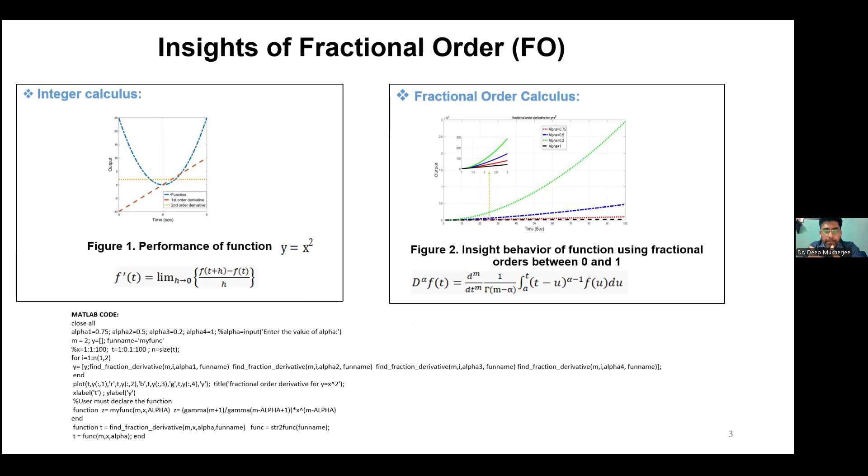But whenever you design the fractional order control, you will get a fractional order transfer function, and solving this fractional order transfer function in MATLAB is a very difficult task. That is why it's a very common practice to approximate the fractional order term into an integer order form.

Otherwise it is a long time simulation run, because infinite memory is there. More memory elements means it requires more past values of information, so it runs for a long time and is computationally expensive. To overcome this computational complexity, approximation is very necessary. There are two types of approximation available: one is the indirect approach, and another is the direct approach.

If you find any research papers or materials on fractional order control, in most cases the direct method has been applied, not the indirect methods. The reason is that indirect methods are basically of three types: the GL method, Grünwald-Letnikov; the Riemann-Liouville method; and the Caputo fractional differential method. They follow a discretization rule.

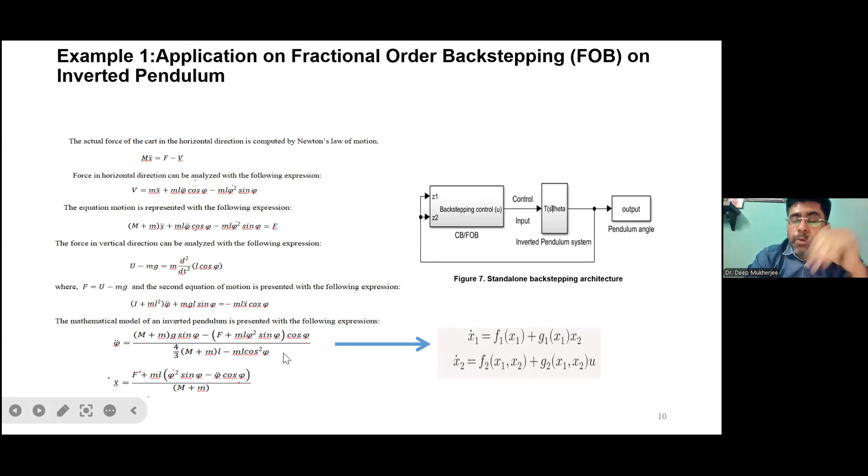So this is Z1 and Z2, that is the subsystem. This is the particular nonlinear model. For these nonlinear models, you have to define the subsystem. There are state variables you have to represent to design the backstepping law. So that is y1 equals phi and y2 equals phi dot to the power alpha here. So after identifying this particular state variable, the state equation comes.

So y1 dot equals y2, and y2 dot equals a function of y1, y2 plus g of y1 times u. Okay, so this is basically the kinematic form. The first row, y1 dot equals y2, is the kinematic form, and the second term isolates the nonlinear drift and the gain, and u is the actual control input that needs to be designed. So the first subsystem needs to be stabilized first, followed by the second subsystem.

So here you have to use two Lyapunov functions. First v1 that we have considered in the same rule. Following the rules, here we have shown step by step the design method. For the backstepping controller we have designed this subsystem z1 equals y1, and followed by that we have constructed this Lyapunov function v1 equals half z1 squared, and the corresponding fractional derivative because alpha is there. So that is the expression that we have got.

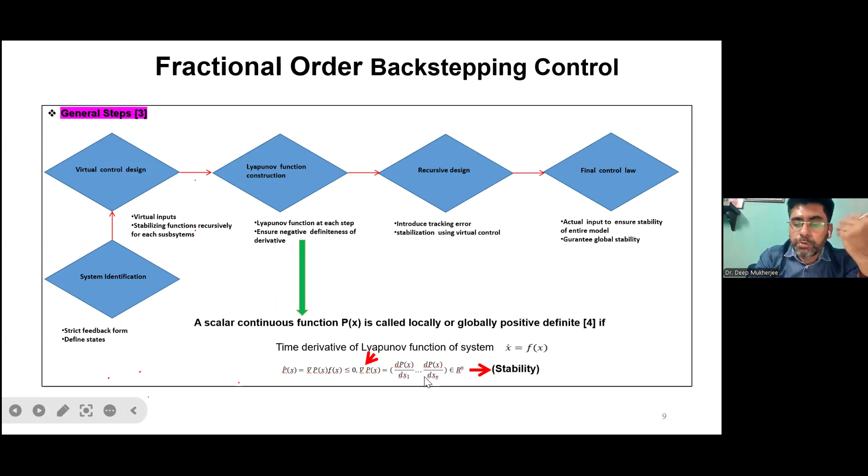So now you have introduced the error, because you have to compute the virtual control law. This is the particular error function, and this y1 is the virtual control. By substituting, with some necessary arrangements and simplification, we need to stabilize the first subsystem, that is z1, so that it should be less than 0. It should follow this Lyapunov function criterion, the criterion of global asymptotic stability. After that, you have to move to the second subsystem.

So you have to introduce the second Lyapunov function, that is half z1 squared plus half z2 squared. Similarly, you have to define the second subsystem to make it stable. So that is the particular law. So by necessary substitution here, with the parameters that we have, finally we achieve this control. So that is the u, known as the final control input.

So it is known as a backstepping law. This is a backstepping law because there are two subsystems that we have incorporated here. If you were to apply 3-4 subsystems, it continues. So until this final control law is achieved, you have to move step by step backward, stabilizing each subsystem by ensuring global stability, so that your entire model is stable. So that is the final control law.

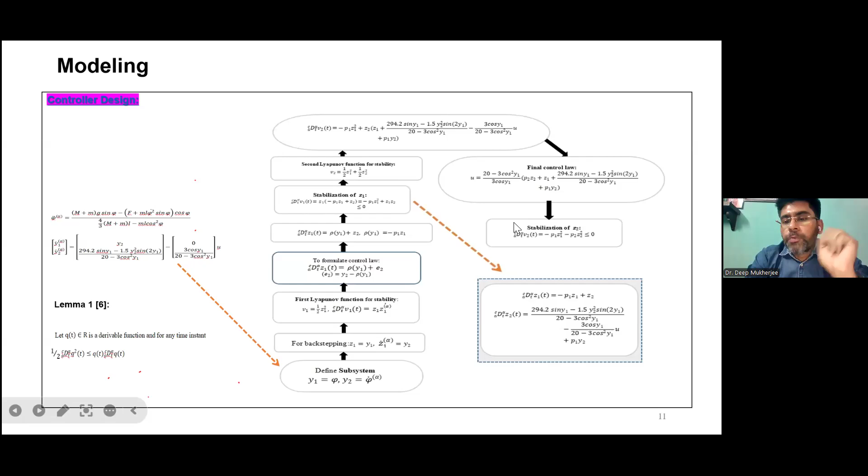So here, by trial and error, we have chosen the fractional order values, which may be 0.4, 0.8, and 0.6. We have not applied an optimization technique, but research is going on; it is under process, and the next work will apply the optimization technique. So first, to observe how this backstepping control works and how it performs against the other scheme, we randomly chose the fractional order 0.6, 0.8, and among these we chose the appropriate fractional order by looking at their time domain and frequency domain analysis.

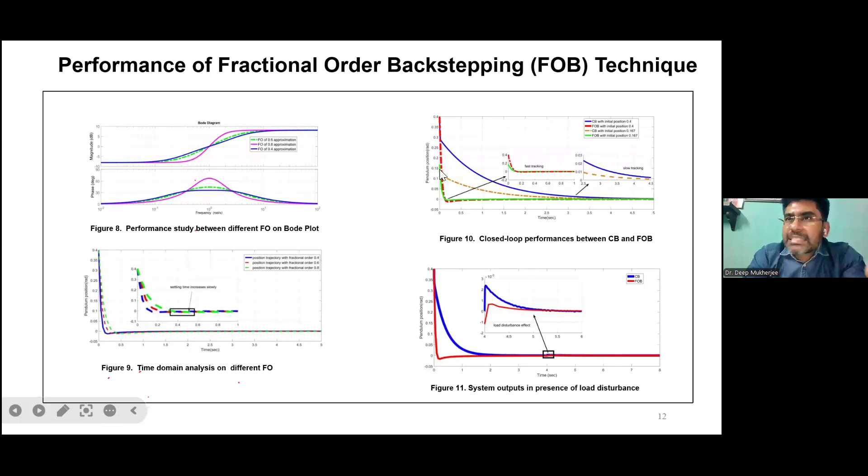So here we have chosen the fractional order 0.4. Using this fractional order 0.4, we observed the response performance of conventional backstepping and fractional order backstepping methods. We started from a random initial angular position of 0.4 and 0.167, and our objective is to stabilize the system to the upright position, that is 0. Both conventional backstepping and fractional order backstepping successfully track this 0 position, but the conventional one becomes sluggish and takes more time to reach the upright position, unlike the fractional order, which quickly settles at the 0 position.

So here the fractional order backstepping outperformed the conventional one. We moved on to several analyses by applying a load disturbance at time t equal to 4 seconds, and observed the effectiveness of this topology over the conventional backstepping methods. It quickly settles at the zero position, unlike the conventional backstepping methods. Here we introduced noise and applied a saturation limit in the presence of noise, and we observed that the fractional order control effort gives a more stable control output, with no such oscillations, unlike the conventional backstepping methods.

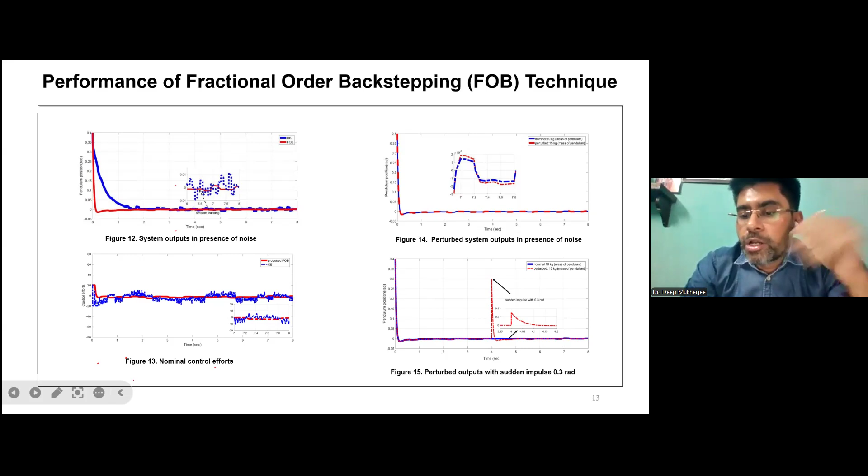Another important measurement that we have done: at 4 seconds we applied a sudden impulse of 0.3 radians. So it starts from 0.4 and suddenly 0.3 radians is applied. Despite this sudden impulse, you can notice the fractional order control effectively tracks the zero position without oscillations. So this is the most handsome outcome that we are getting using the fractional order backstepping methods, and here we also changed the value of the mass of the pendulum. So we have tested the robustness of this fractional order backstepping, incorporating the sudden impulse at 0.3 rad.

Okay, so now here a comparative study has been done. These are our previous works that we have published in papers, where we applied fractional order model reference adaptive control to the pendulum models, with the particular tuning parameters we utilized on these models, and here we have applied fractional order backstepping methods. If you see the outputs in presence of noise and the nominal control efforts, the proposed fractional order backstepping method outperforms the other schemes.

This analysis proves that the proposed fractional order backstepping, under disturbance, outperforms in terms of lower performance metrics, less error and less total variation. That is the outcome we have got throughout this analysis. So the proposed FOB can be considered the most efficient alternative topology to stabilize this mechanical under-actuated process, for example the pendulum we have used, which is more stable.

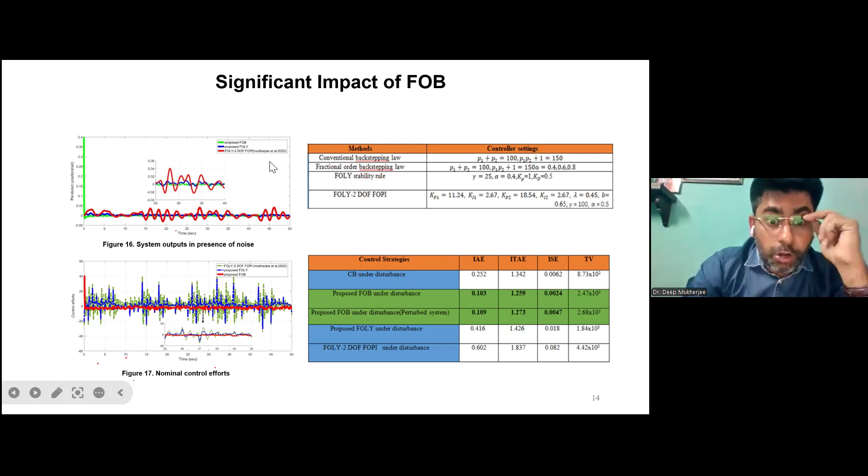Through the analysis we observed that the Lyapunov stability rule outperforms the MIT rule, because the MIT rule does not give you the inherent stability of the process. That is what we experienced on this particular nonlinear system. Similarly, by applying this FOB, we have designed for the continuous stirred tank reactor, CSTR, models. That is a three-state system: height, concentration, and temperature.

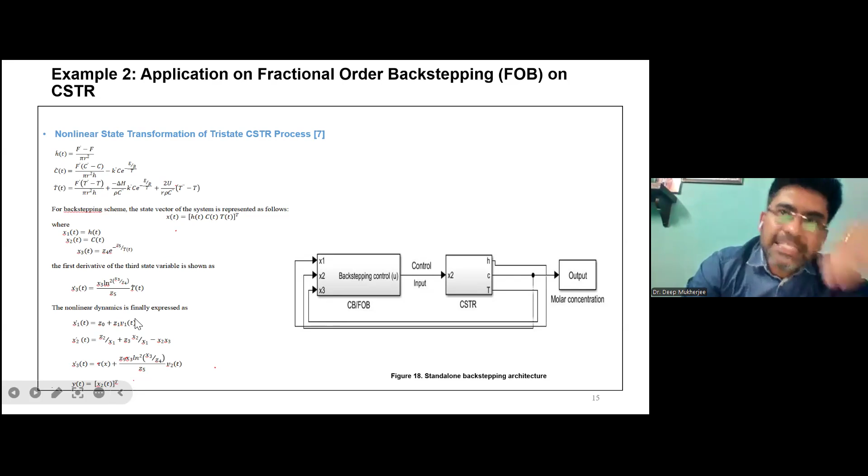You first select the control variables, then introduce the errors. By using the necessary substitution and simplification, you stabilize the first subsystem, then move to the second subsystem for stabilization. The first subsystem includes the Lyapunov function. By getting the fractional order derivative, which comes out less than 0, negative, it shows global asymptotic stability.

Like the inverted pendulum, we applied the same procedures to the CSTR process, and ultimately designed this fractional order stability law. It steps backward from the inner subsystem, and each subsystem is stabilized by introducing the virtual control law and error brackets. You introduce a particular Lyapunov function to ensure global asymptotic stability, so that the entire model becomes more stable. That is the main fundamental concept of this fractional order backstepping topology.

Fractional order means we have just introduced an additional degree of freedom, that is the alpha. That's all. Now you have to solve this approximation; you can solve it using the biquadratic exact phase, or the Oustaloup approximation. But what I have experienced and shown here is that the biquadratic exact phase is a better alternative than Oustaloup, because it provides a more stable approximation.

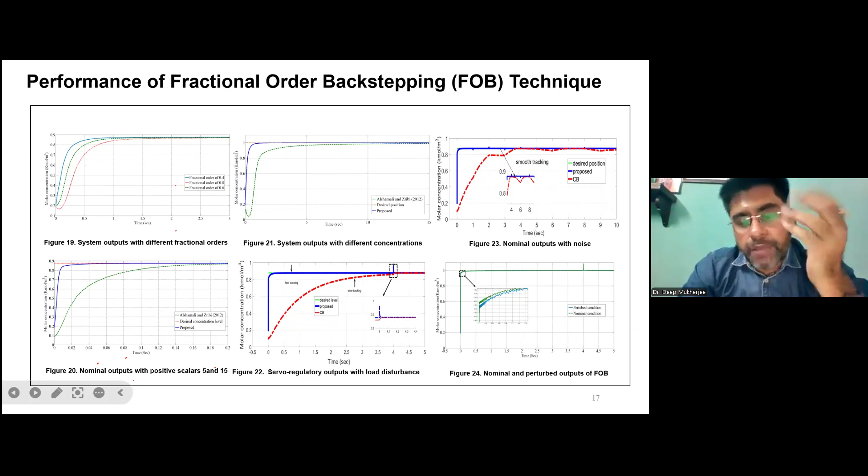So here are the nominal and perturbed conditions. We have applied this by changing the CSTR parameters, the internal parameters, and analyzed the robust performance. It still follows this particular track and concentration level in spite of changing the parameters. So we have attained this performance through the fractional order backstepping method.

And here we have also introduced some noise, and it shows that the fractional order backstepping is robust in the noise rejection process. We have compared this fractional backstepping with some existing work, FOPID by experts, and our works, FOLY-FOPID, and the augmented FOPID with FOMRSC technique. We observed the servo responses, outputs and input control efforts, and concluded that the proposed FOB more swiftly and gracefully tracks the concentration.

In spite of load disturbance and introduced noise, it shows the most robust noise rejection and more stable outcomes, with lower performance errors: integral square error, integral absolute error, and so on. These values are lower than the other control topologies. We also found the total variation, TV, of the control output.

So throughout this analysis, we can conclude that the fractional order backstepping shows no overshoot, robust servo and noise rejection, high speed of convergence, the lowest error metrics, and the smoothest control efforts. So that is all about my work.

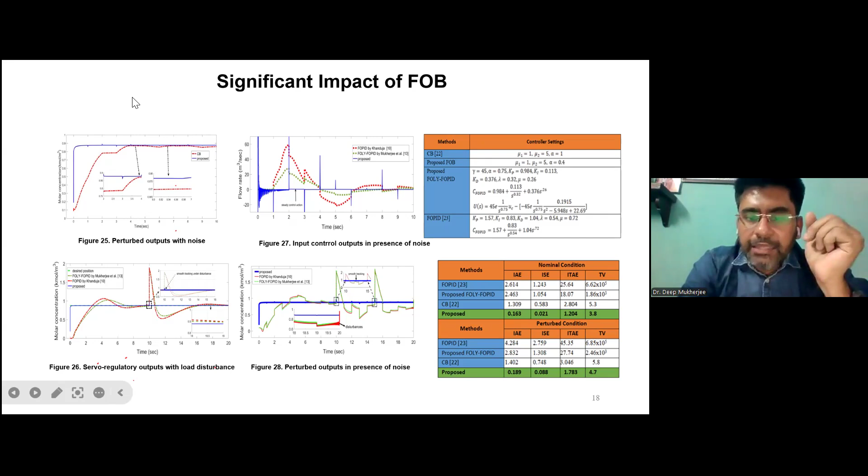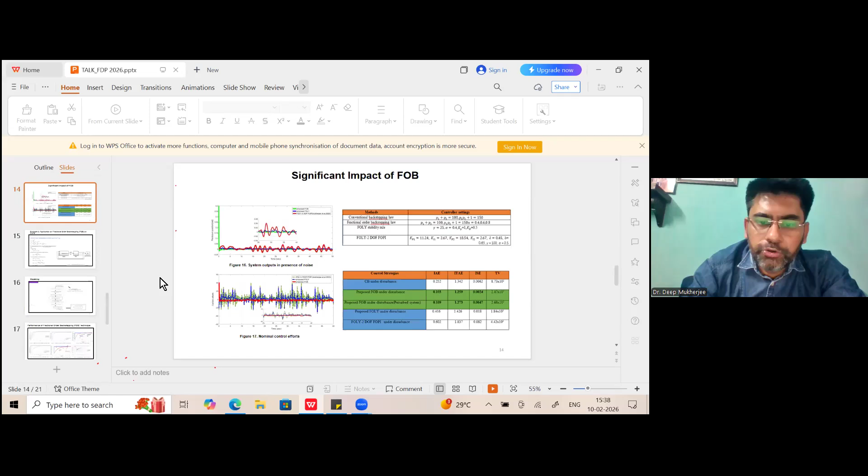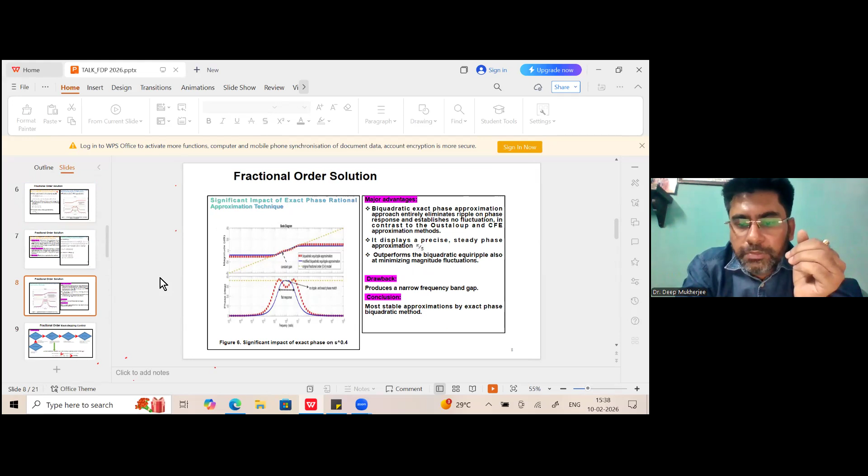Different fractional order control techniques like direct and indirect methods. Basically, from my opinion, what we have faced till now is that the indirect method is mostly preferred, because if you put it in real time with entire transfer function models, you have to transform into discrete form. It has to be truncated from infinite memory to n series elements. So you have to look for accuracy, the step size, and other things - this complexity may come up in this case.

So there is a long time simulation. There is computational complexity involved.

That is why, for fractional order approximation, if you solely approximate - suppose s to the power function - this is only approximated and converted to a rational transfer function model, a suitable integer order form, so that you can get a better approximation process. That would be easier to implement. But if you use a rational transfer function model, that will save you time, and you just have to look at frequency bandgap selection - by lower and higher order frequency bandgap selection in real time, you can approximate the particular fractional order. So in this way we can think about it.

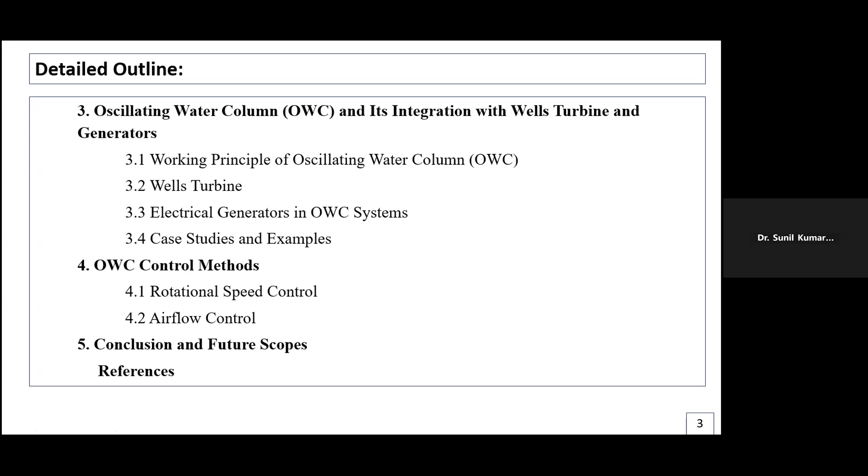So as we know, renewable energy is actually the need of the day.

The most important thing is that fossil fuels are limited, and when we use them, the chemicals released into the environment cause a lot of problems for our climate, like global warming, and also pollution of the air that creates problems like lung problems. So it is very important to include as much renewable energy as possible.

With this motivation, I started working in this area, like other areas such as solar energy, wind energy, geothermal energy, and tidal energy. I explored ocean wave energy, mainly from my PhD time, and I did my PhD thesis on this.

This area is not very new actually, it is very old, but the investment needed in this area has been very less. That is why we are still in the early stage of development in this area.

But ocean wave energy is also very significant. How can we say this is significant? Because we know the oceans cover almost 70% of the Earth's surface, and a country like ours, India, has almost 2/3 coastal area, meaning from three sides we have coastal lines. So if small plants are installed in these coastal lines that can store and supply energy for local needs, it can complement other energy sources, and the demand for other sources can be lowered significantly.

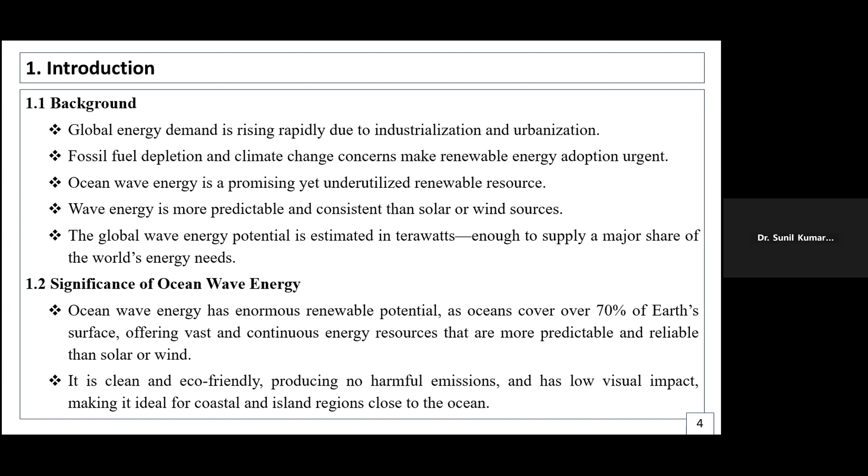Now, when we talk about history, the wave energy concept existed earlier too, waves were used for different purposes. But the first technology like oscillating water column was developed in 1966. This was used as a floating buoy for lighting lamps when ships were navigating through oceans. Small turbine columns, oscillating water columns, were used to drive small turbines to light lamps used inside the ship. So it was a very old concept.

Later, this concept was used on the seashore to convert sea wave energy into electrical energy. If you search 'oscillating water column pilot projects' on the internet, you'll find many pilot projects running throughout the world, in countries like UK, Portugal, Spain, Australia.

In fact, our country also had one oscillating water column power plant, installed in 1991 in Thiruvananthapuram, Kerala. It was there since then, but because it completed its lifetime and there was no further investment in this area, it was decommissioned in 2010.

More recently, one professor in IIT Madras, Professor Abdus Samad, is also working in this area, ocean wave energy. He has tied up with a private company for making the prototype and deploying it in the sea. So many pilot projects are there all over the world, some at the commercial level, some at pre-commercial level, and some are pilot projects only, but full commercialization of this is still awaiting.

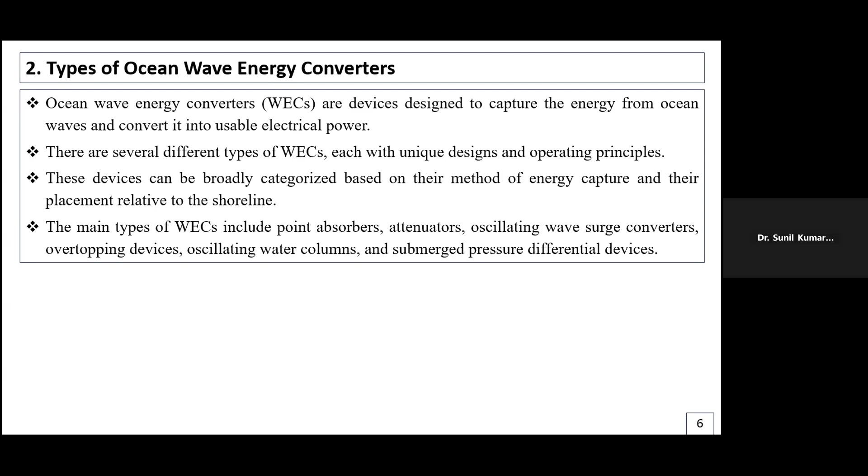So first, it is very popular actually, the point absorber. So if we see how this converts into electrical energy, you see this actually represents the sea waves.

I just want to confirm, am I audible properly and understandable to everyone? Yes, sir, you're audible. Okay, thank you, madam.

Okay, so here you see this is just a representation of the wave. So when waves come, there is a floating buoy which goes up and down, and here it is connected with a piston, and it is a kind of linear cylinder. So here it is directly connected to a linear generator, so that generator directly generates electricity. This is one way, or it may also be connected to a hydraulic, which converts linear motion into rotatory motion. So that can also be done.

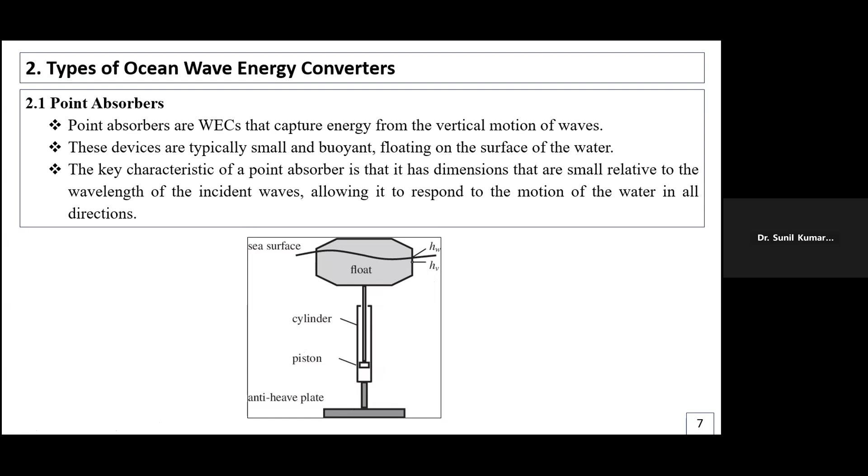Based on that, when waves keep on coming and this float goes up and down, electrical energy is generated. Obviously, it will be fluctuating energy, but this is one of the techniques for converting into electrical energy. Later, that energy can go through power converters. All those things can be smoothened out and stored somewhere, and then later it can be used. So this is one technique, and this is a practical example of this technique, the point absorber device.

So this is called attenuators. These attenuators have joints. These are actually different tubes, connected together, and in the middle we have some power conversion modules. These are tied to the seabed. You see these lines are tied to the seabed, so that it does not go away with the flow of waves.

So here you see when the waves come, these tubes will move up and down. Based on that, these hydraulic systems will have some differential, and based on that differential, some potential will be generated and electrical current will flow. Together all these are connected, and then this power is generated and taken out. So this is another technique called attenuators.

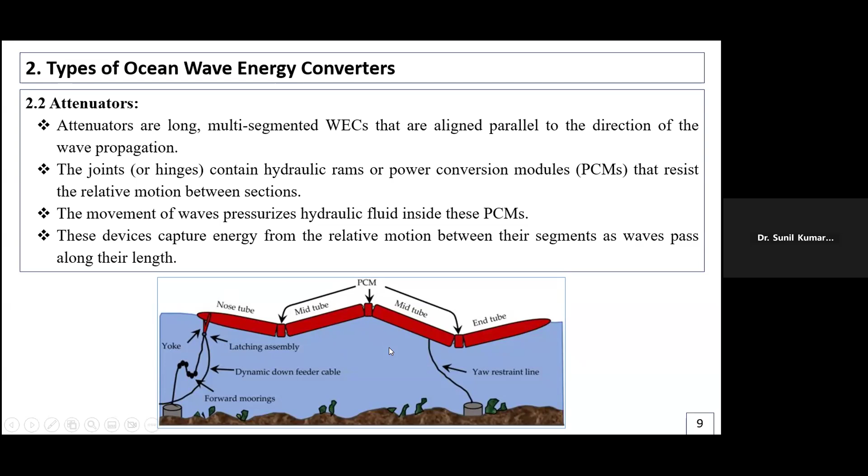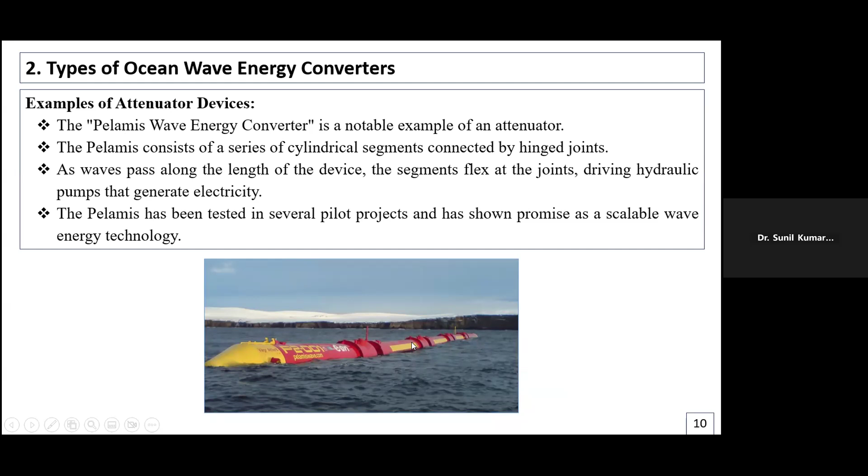So here this is the real example of an attenuator called the Pelamis wave energy converter. It is also the name of the company. So this company developed this wave energy converter, which is based on this attenuation concept.

Now, next is oscillating wave surge converters. So here we have a flap, which is not very far from the seashore, very close to the seashore. We can see that this is fixed at the seabed, and this flap moves as per the direction of the waves. Suppose the wave is coming from this side to this side, so it will go to that side, and then again it will recede to this side.

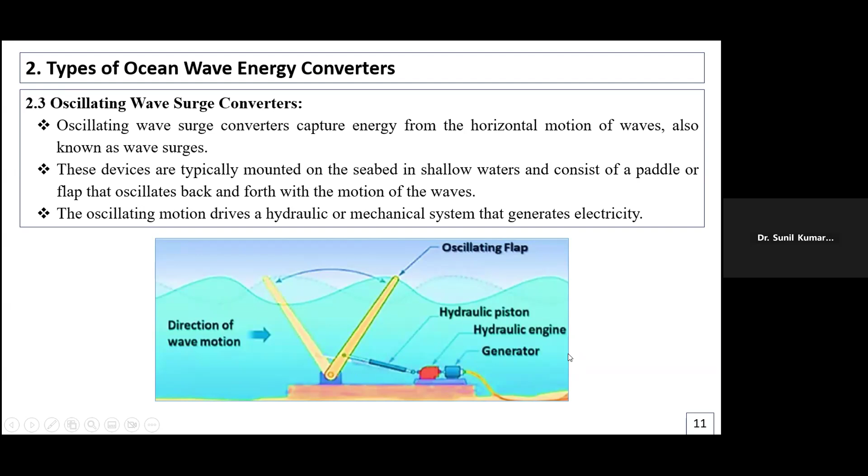So based on that, it is connected to a hydraulic pump, and this hydraulic will convert this linear motion, meaning flap motion, into a rotatory motion, and then that will drive the generator. And then this generator will generate some electrical energy which can be taken out. So this technique is called oscillating wave surge converters.

This is another actual device, the WaveRoller, which was developed by AW Energy, and this is the animated diagram of this WaveRoller. I could not find the real picture, so I just used this animated diagram. So this is the flap, which moves like this, and here we have some motor connected, and this is the wire which goes to the grid. So this technique is called the oscillating wave surge converter device.

Then we have another technique which is kind of semi-hydro energy, where water is actually used to drive the turbine. So we also call it hydro turbine or hydropower. So what happens here? Some ramp type of structure is made. So when waves strike this ramp, because we have some wave height coming up and down, what happens here?

This reservoir is filled, and then this reservoir has some cavity, and in that cavity some turbine generator system is set up. So in that cavity the water pressure is applied, and based on that, this water flows out from this direction, and this turbine is driven. When this turbine is driven, this generator is also driven, and based on that, electrical energy is generated. So we can see that this turbine is driven based on the concept of hydro energy or hydropower plants.

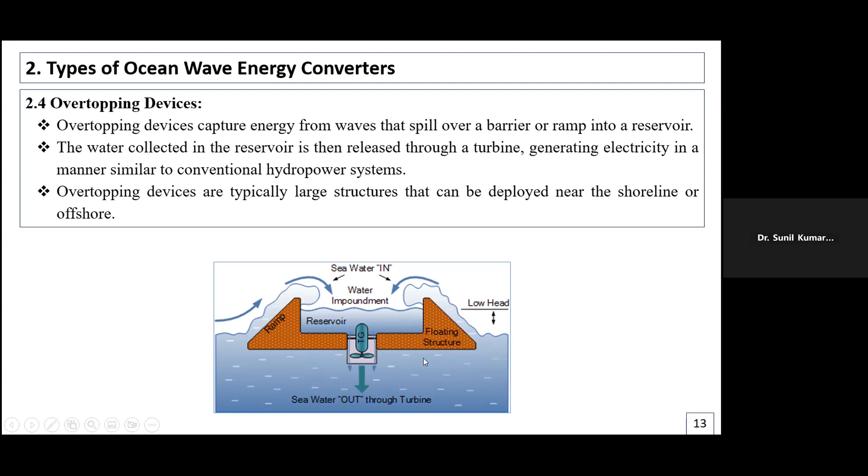So basically here, using waves, the water is filled in this reservoir, and then this water drives this turbine generator system. So we also have some companies like Wave Dragon, which is using this concept. This is the name of the device and also the name of the company.

Sometimes it is done onshore also, meaning some 100-200 meters away from the shore, cylindrical oscillating water columns are built, and this type of structure is just on the seashore. So I hope people are able to understand what is the seashore and what is onshore, meaning just a little bit away from the seashore, and offshore is a little bit more away from the seashore, like 1 or 2 kilometers away. So I hope this concept is understandable to everyone.

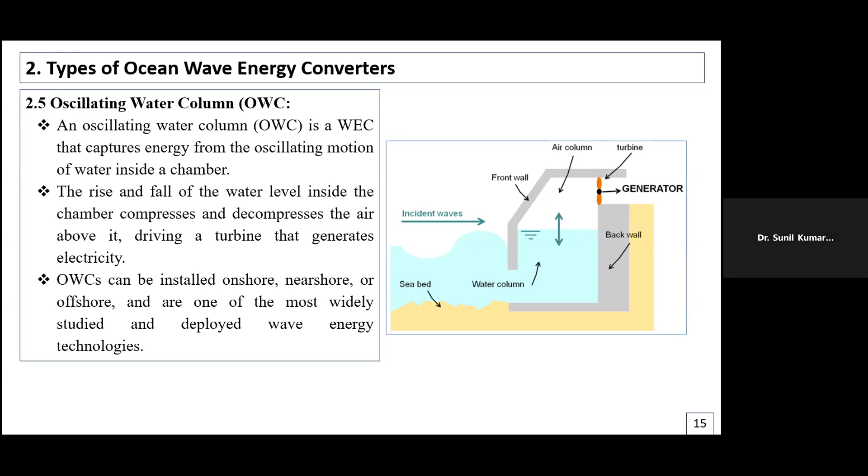Hello. Sorry, I think Daniel G is asking something. Hello. Sir, please go ahead. Okay.

But because here it is converting bidirectional airflow into one direction, it will also have some problems, and that problem is called stalling problem. So I'll discuss that problem later.

Now here we can see what is the advantage of this Wells turbine. First of all, it is simple and it has better efficiency as compared to other available alternatives, and it can be scaled. It can be very small, like we can also make a small prototype in our lab. It can be made up to megawatt range also. So it is very much scalable.

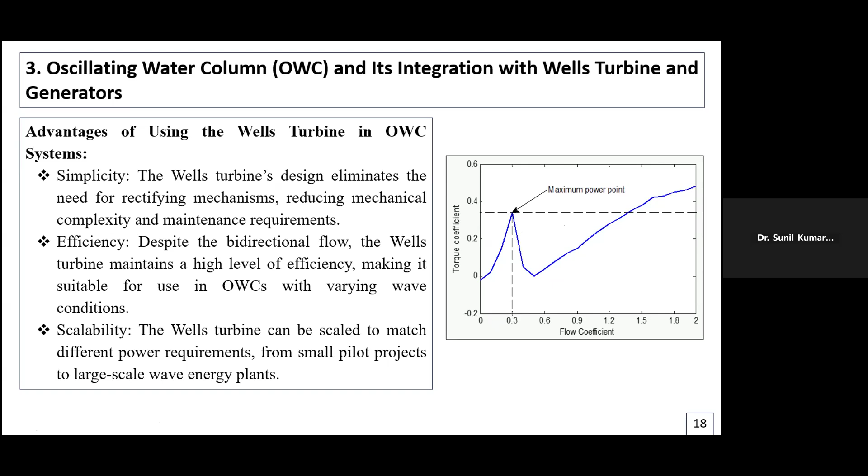Now coming to control techniques. So what are the control techniques available over here? So one technique is, actually, you see the air column is partially filled. So at the top it has partially filled air. So suppose we have very extreme conditions. Suddenly the water level goes up and down suddenly. So air pressure will also follow that same trend.

To act here immediately, we need to predict first of all whatever wave is coming, based on its height, that the water level is going to be this, and based on that immediately we need some extra valves to release additional air so that the turbine and generator setup operate in a proper range. Otherwise it may get damaged, or if it does not get damaged, it may provide some sudden spikes in the power level that may not be good for the grid. So that is why an airflow controller is needed at the input end.

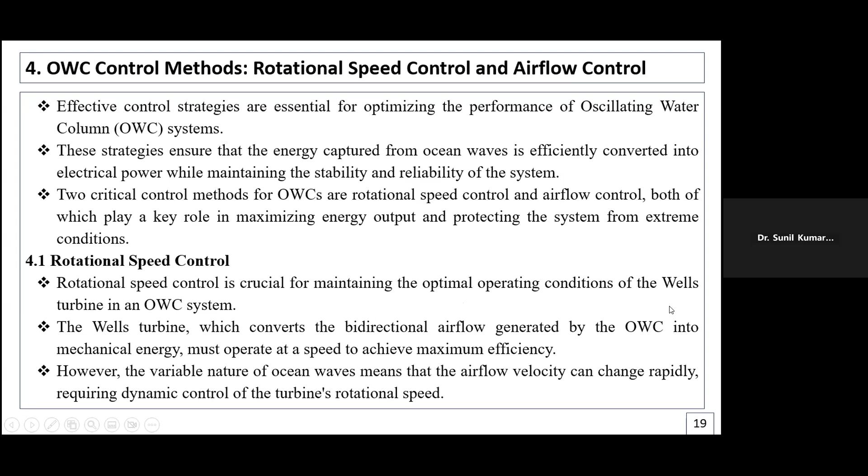And rotational speed controllers are operated from the generator side. These rotational speed controllers can adjust the speed as per the requirement, so that we are also able to achieve maximum power point. So these are the two techniques which are available here. And as I have already mentioned, rotational speed control is used for getting optimal operating conditions of the Wells turbine in an OWC system.

So it may look contradictory. These two controllers are not contradictory to each other. So both these controllers basically need to be complementary to each other. The main objective of the airflow controller should be to avoid extreme conditions. And for this controller, it should be to get optimized results or maximum possible output power.

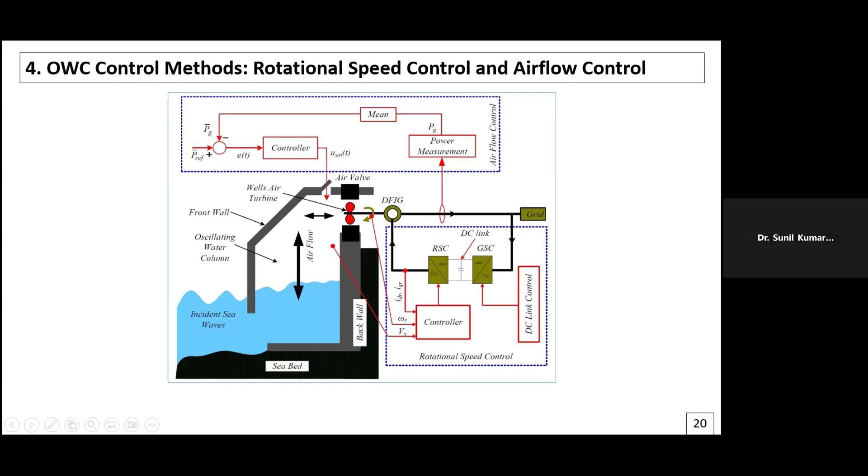So, okay, I have already explained all these points, so I would not like to read all these things. Like maximizing the efficiency is one of the objectives. Stability, obviously, stable operation, and then protection means overspeeding, all those things. Because if we control the speed as per our requirements, overspeeding can be avoided during extreme weather conditions. The same thing can also be avoided from airflow control also.

And these are the challenges, because the waves have very high variation. So unlike wind energy, where variations are a little slow, in wave we have very high variations. So here the control challenge is obviously to have very dynamic response. The controller must be able to respond quickly to sudden changes in the wave conditions. So I have done some studies, some research work. I'll just explain in a little while.

Then power quality issue is there in wave energy. Obviously, power quality issue is there because whatever power is generated, it cannot be constant at the generation end. It needs further processing, and only then it can be connected to grid. So I have done all those real-time studies also.

I'll be explaining later. And mechanical wear and tear obviously is there, because when we vary the speed too frequently based on the wave conditions, the rotor and the bearings will get affected in a very bad way. So actually very high quality mechanical components are required.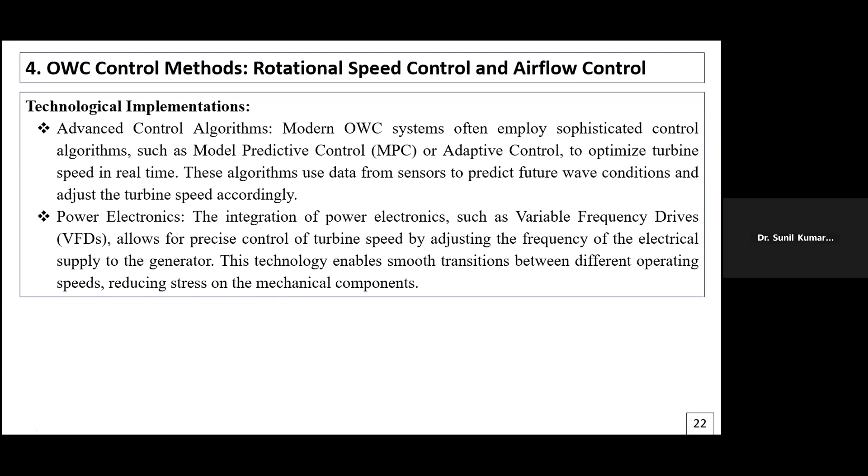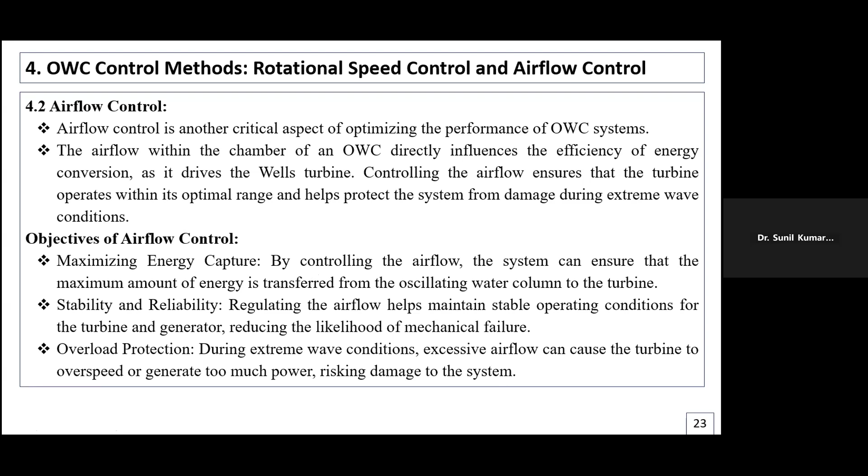But obviously when wave height is very low, we can't do anything. If the input source is very low, we have to leave it as it is. But the moment it goes very high, that has to be mitigated through this airflow controller. Other things like stability, reliability and maximum energy conversion can also be achieved. But maximum energy conversion, based on my experience, we can better achieve through the rotational speed controller as compared to the airflow controller.

Okay. So I hope I have given a good idea about the area so that all of us are comfortable. If somebody already has an idea about the area, it's very nice. But those who are seeing it for the first time, I hope they have got something.

So obviously, the objective of OWC is to convert wave motion into clean, renewable energy. They use this turbine generator to convert. The role of the turbine is to convert bidirectional airflow into unidirectional rotation. Then we need control methods to control speed and airflow to get optimized turbine efficiency and optimized output power.

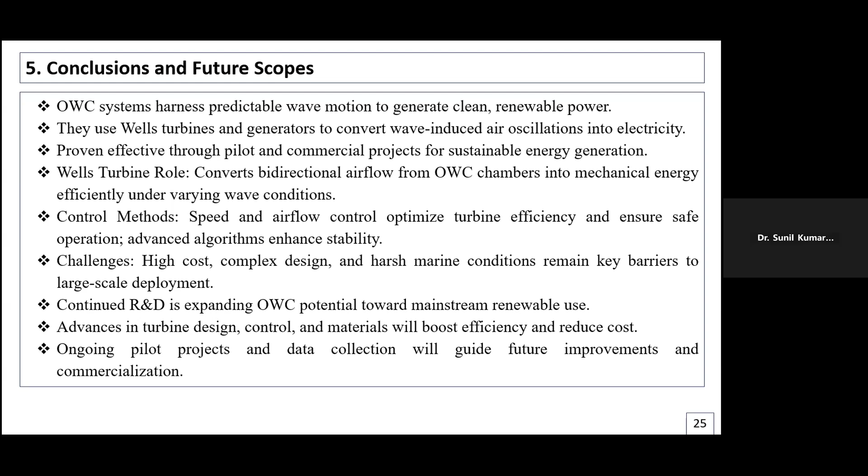R&D is very much required in this area for all the aspects. My aspect is actually control, but more than control, the materials aspect is very important. Material which can withstand harsh marine conditions is very important. So all these things and pilot projects, I hope, will lead to future improvements and commercialization.

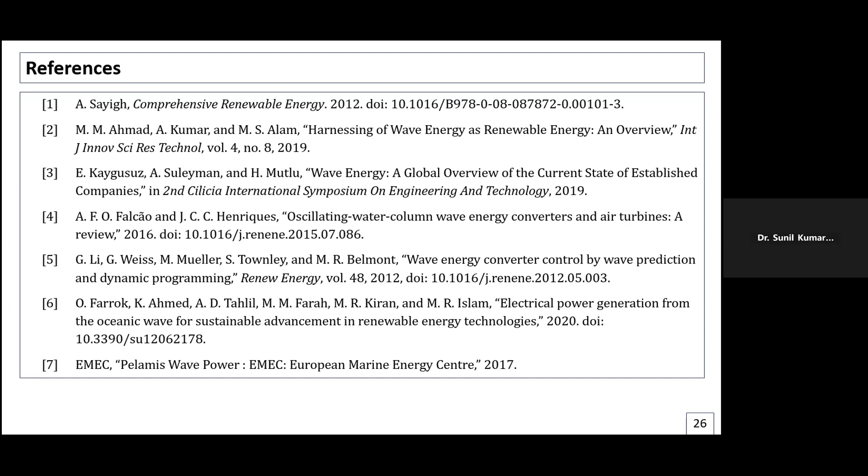Okay, so this is my first part. Now let us move towards the second part of the presentation. Now I'll be moving towards one of my recent research papers, which was published in Scientific Reports. The discussion will be of two points. First is the mathematical overview of the OWC plant. Second, how we can design the controller.

So here we have designed a rotational speed controller using a neural network backstepping control approach. So why is there a need for a neural network here, and why are we introducing it? I'll be explaining all those things in due time. So let us first try to understand the mathematics.

So for waves, what is the important thing? The important thing is the wave height, the wave that is coming. So this wave height is very important. For that, there are two ways. The simplified way is to use sinusoidal waves of some period. Generally, the standard time period is 10 seconds. So that can be used, but that is a very simplified one.

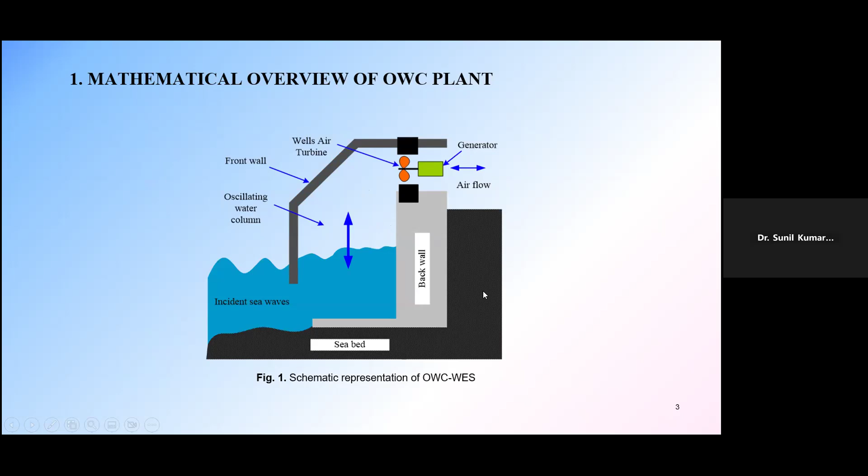Now from here, only two control problems are originating. Either we can manipulate air velocity, or we can manipulate the rotor speed. So suppose I manipulate air velocity.

Air velocity is directly proportional to flow coefficient, as I've already shown in the diagram. Flow coefficient must be below some value; for this particular model it was around 0.3. So if flow coefficient is more than 0.3 and we want to drag it down, we can reduce the airflow by releasing the excess air through the air valve. So the airflow going to the turbine duct will reduce and the flow coefficient will come around 0.3.

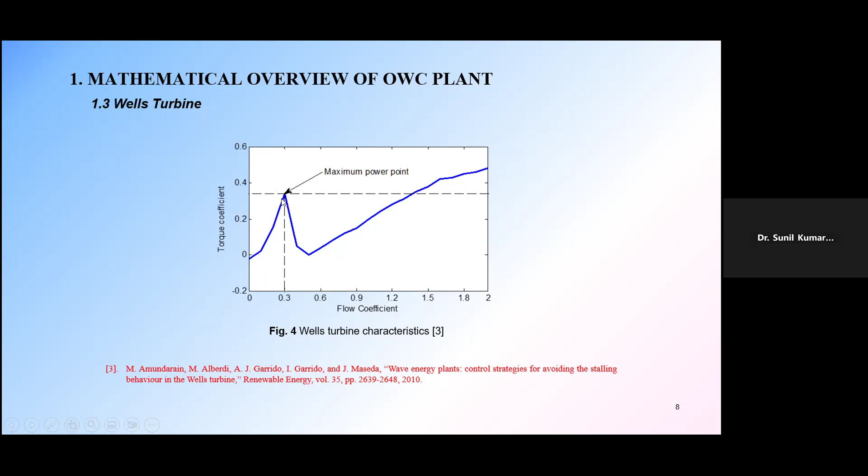Then coming to generator model. So generator is DFIG type. Here we obviously have stator and rotor. So stator will have 3 phase and rotor will also have 3 phases if it is 3-phase DFIG.

But when we talk about controller design, it is very difficult to do analysis in 3-phase equations. So what is actually done is the synchronous rotating frame is converted - it's just a frame referencing. The frame is converted into DQ equivalent. So here we can convert stator equations into D and Q type stator equations, then D and Q type rotor equations. So ABC is actually converted into DQ.

It is also called Park transformation. Those who have done some study in machines are obviously familiar with this.

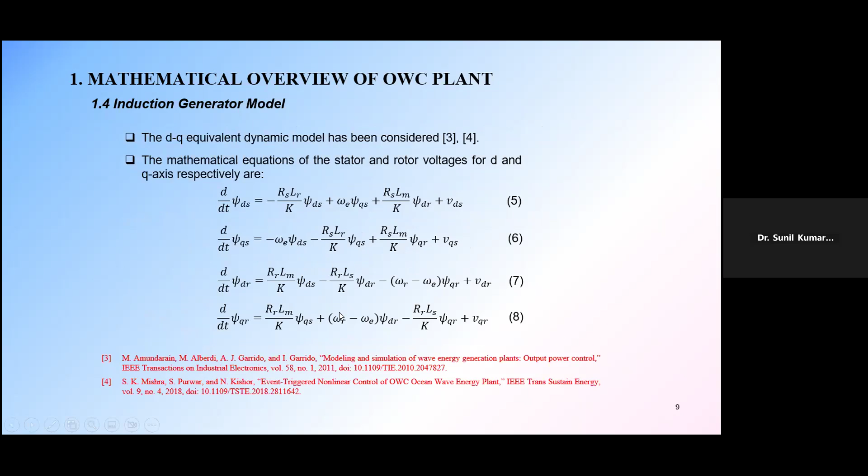So we have a 5th order system, and previous equations are not actually differential equations. All these are algebraic equations, nonlinear algebraic equations. For example, this torque equation or any other equation previously - this is also proportional, it is not a differential equation, just derivative of wave height gives air velocity. So there is no back relationship. Based on that, we can derive the 5th order system.

Now how can we actually derive the controller? So some of the steps I have skipped here - this 5th order system, we convert using a flux oriented control approach to a 2nd order system.

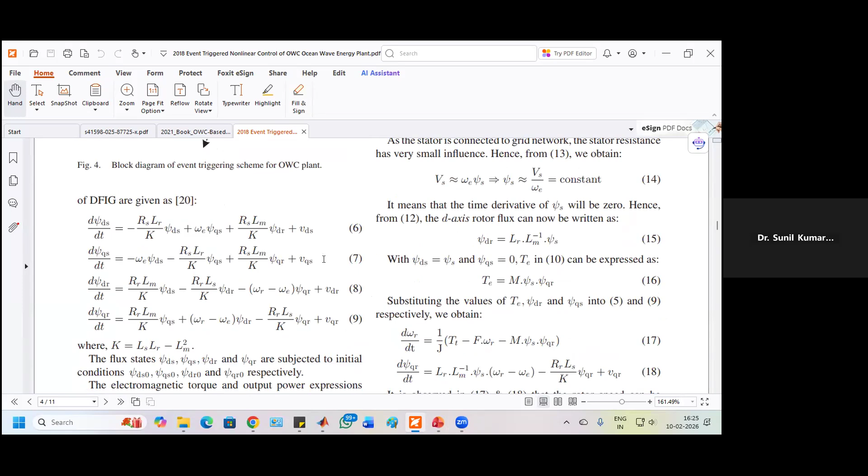Just quickly I want to show one research paper so that people will have an idea. This is one of my old research papers which was published in IEEE Transactions on Sustainable Energy. Here you can see these equations - we have formulated the control problem. We converted all these equations using flux oriented control by these assumptions, all these things quickly we can see.

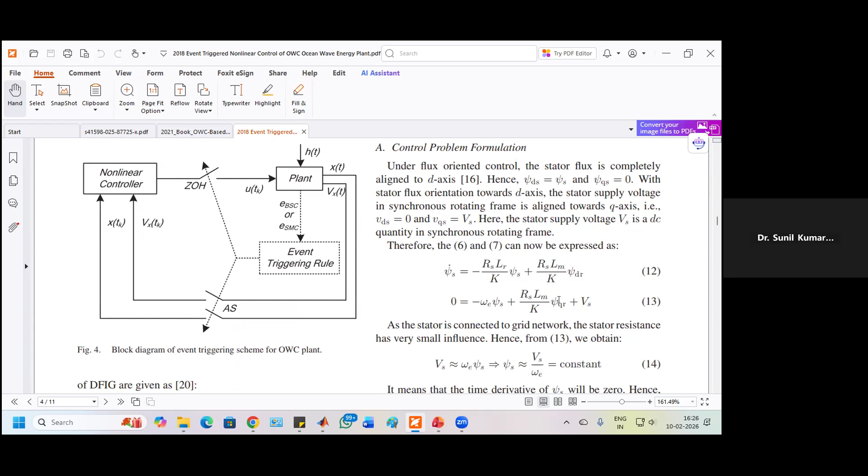And based on that, we converted all these equations into a second order equation. So this type of equation is converted, and in simplified form can be written like this, in state space form: x1 dot, x2 dot, where x1, x2 meanings are given over here. These are the states - omega r is represented by x1 and psi qr is represented by x2, and all others have their meanings given.

So basically what I'm trying to suggest is that this model we are going to use for controller design. This conversion is given in this research paper. If somebody is interested, they can see it.

Okay, so now coming to the controller design. First of all, we have designed this neural network backstepping controller. Earlier also I designed the backstepping controller, but in this paper I introduced the concept of neural network, because this model is very complicated and we are using a simplified model basically. So there are many unknown dynamics of the system.

Now we cannot measure those dynamics - we don't have any method to measure them. So how to compensate for those dynamics? My assumption is that those dynamics can be assumed to be unknown disturbances. So we integrate neural network with the backstepping controller, and unknown dynamics will be compensated by the neural network.

So how are we proceeding for that? First, we simply design a conventional backstepping controller using Lyapunov stability criteria - obviously if somebody has done nonlinear control theory would know this. Then after the backstepping controller is designed using Lyapunov stability theory, the neural network is integrated into this backstepping controller, and again stability theory is proved.

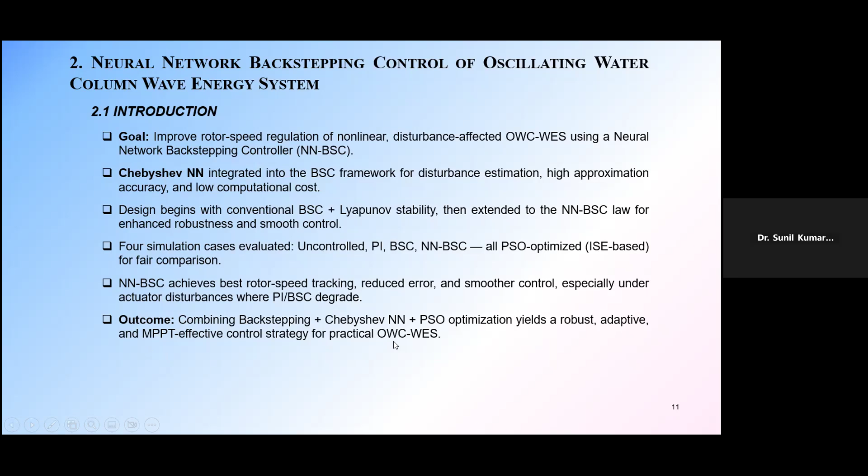So these are some of the highlights, and the outcome is that combined backstepping, Chebyshev neural network, and PSO optimization yields a robust, adaptive, and MPPT effective control strategy for practical OWC system. So now let us discuss a little bit more about the structure of the controller.

Now same wave height we need to use to anticipate what should be our reference speed for maximum power point tracking. So the same wave height we are also giving to the MPPT block. If somebody is interested how the MPPT block is derived, please refer this research paper.

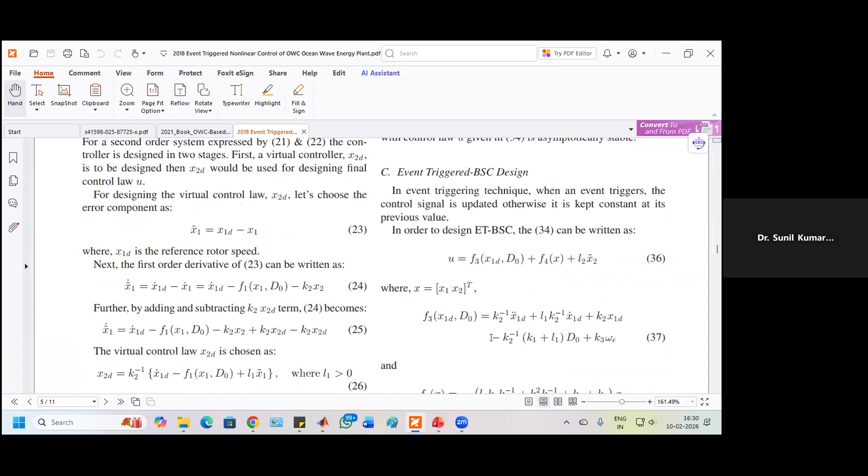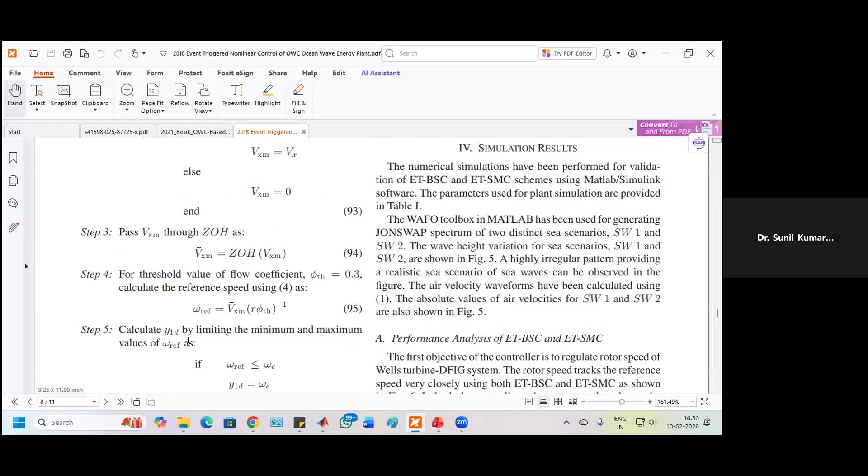Here at the end, the steps of calculating the reference speed or maximum power point is given. Using these steps, I will also show the simulation of how we are doing this. So this part is there.

So now if we go in real time, suppose we want to implement something, it is very difficult to implement this. All these are simplified ones, but this one is very typical. So what I proposed is that this FD can be estimated using neural network directly, using system states only. So directly using system states, we estimate this thing, and based on this estimation, we design the controller. So the requirement of measurement of this very complicated component is avoided.

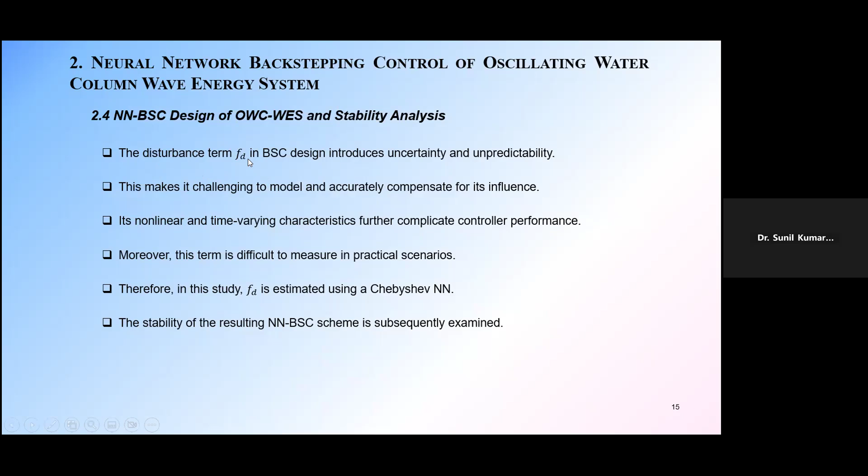You can see. Now, after that, we introduce the neural network for the disturbance term FD. For the neural network, we have used a Chebyshev neural network. Because it is just for a smaller component, we are considering one layer and two inputs. The two inputs are two states. This is a generalized diagram, but only two states are required. So this type of architecture we are using for the Chebyshev neural network.

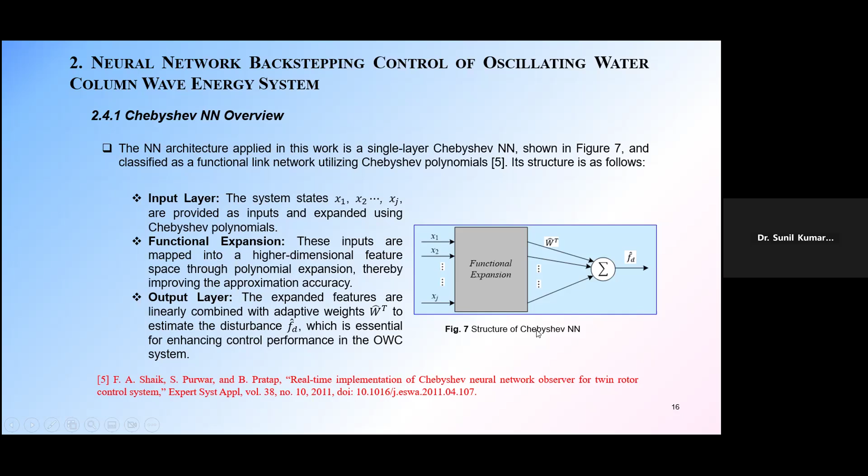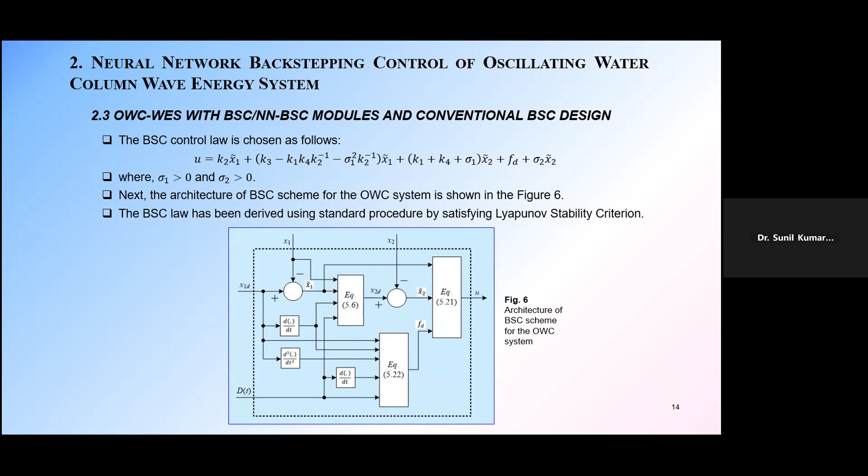But now when we estimate this FD, we need a training adaptation algorithm, which will modify the neural network weights in real time. So we consider this weight adaptation mechanism, and for that we need to again prove the stability. Again, in the research paper, the stability proof is given with all the steps. If any confusion is there, I can go line by line and explain all those expressions if required.

Obviously, we have to consider some Lyapunov candidate function, substitute all the values, and do the derivation. Ultimately, we have to prove that for a positive definite Lyapunov function candidate, its derivative is negative definite; then our control law will make the closed loop system stable. This is the statement we need to prove all the time.

Okay. Now coming to another important point. After proving the stability, we have also considered an integral square error type performance index. This performance index is based on only one parameter: because the objective is rotor speed, the rotor speed error is x1 tilde, and x1 tilde squared gives the ISE. Now this ISE we are minimizing for all these controllers.

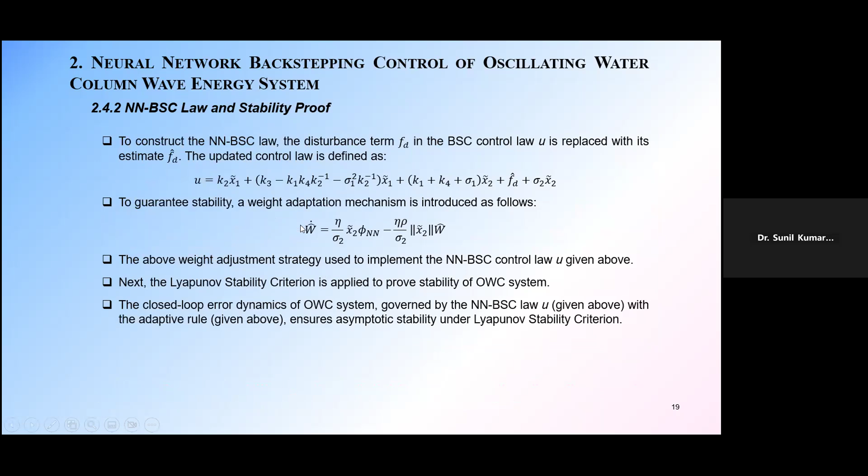Now simulation result: when we talk about ocean wave energy, or any system, basically two things are very important. First is uncontrolled plant, and second is controlled plant. So these are the two broader things. Then within the controlled plant, if we have some previous controllers like PI controllers, backstepping controller, and whatever we are proposing, the comparison of all these things is required. So we have done all those things over here.

See, this controller is having a neural network. Now a neural network needs intensive computation. So the computation burden in this controller is increasing, and that also needs to be taken care of. So only if we have very advanced hardware can we implement this. For low cost applications, it may not be possible sometimes to go for this complicated architecture.

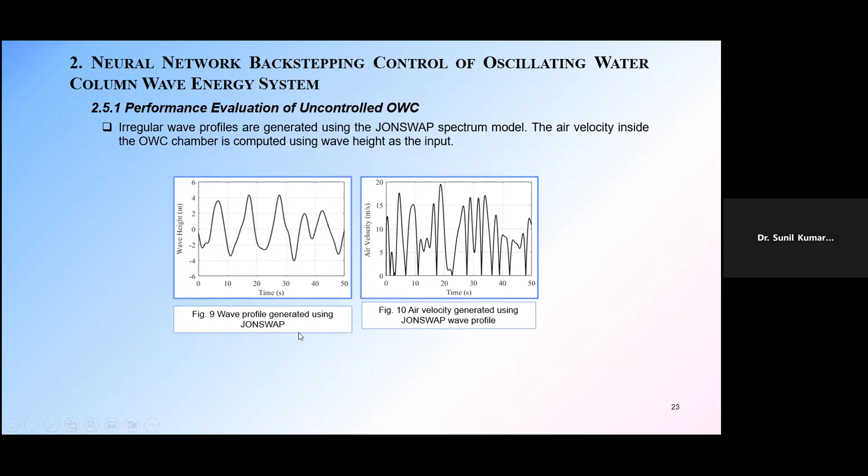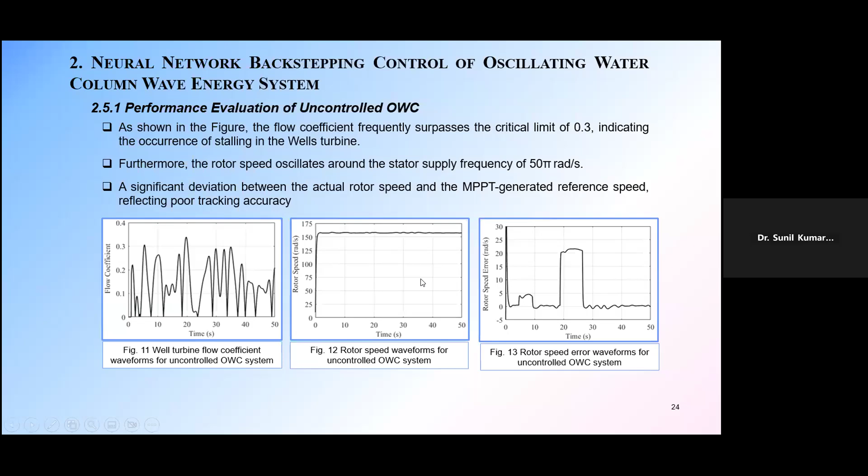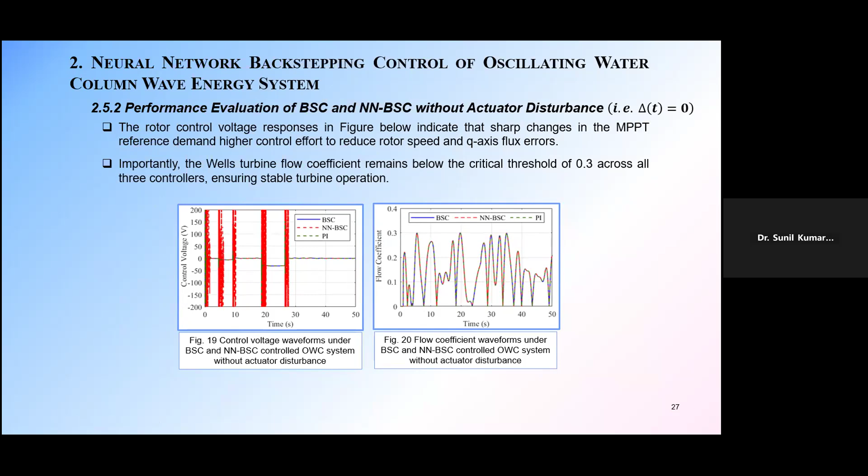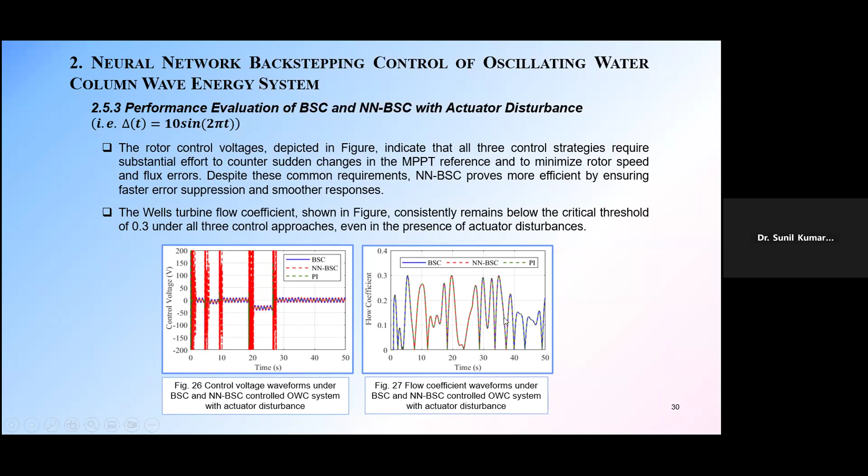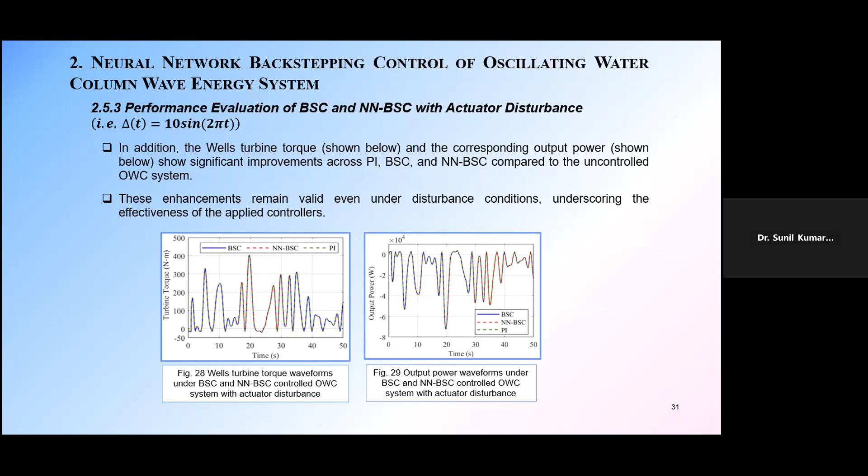Now here also we can see the same thing. This is rotor speed error, this is rotor flux error. Then this is control voltage. Here, because we have already added the sinusoidal disturbance, the effect of that sinusoidal disturbance in U is seen over here, and these are the flow coefficients. Then this turbine torque and output power. So in terms of utility, it is up to the user which controller to apply. But in terms of accuracy, we can definitely say that the neural network backstepping controller is more suitable.

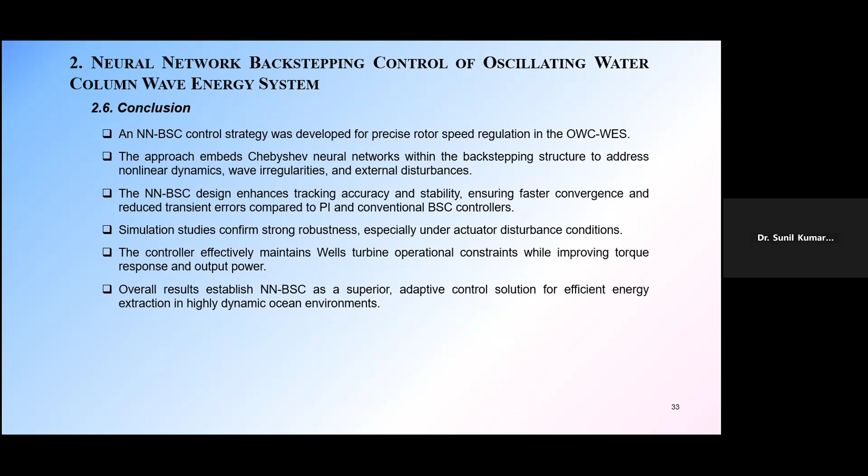So yeah, the same model that has been used in this paper is over here. Is it visible to all of you? Okay.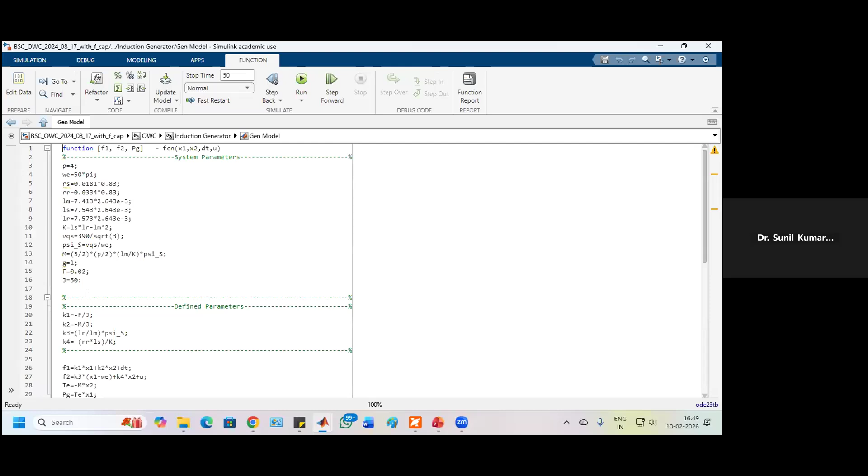Then this is the generator model. This is a simplified one, but we can also use the actual model, the fifth order model, here. So this is the generator model that we are using, and basically it is written in terms of codes. So these are the codes. All the numerical parameters are given over here. Then these are the equations, and then these are the integrators. If somebody has done state space modeling, it is like that.

Then based on that, this rotary speed is again given as feedback to the Wells turbine. And the torque is coming as an input to this, because we have one turbine generator coupling equation. So torque is coming over here and the speed is going as feedback. So this overall completes the model. Now in this, U is the rotor control voltage. This is generated using three controllers.

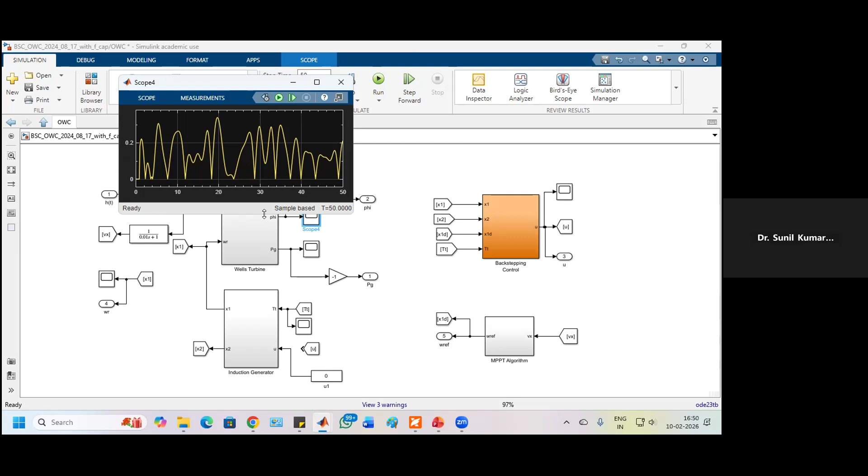So first, for simulation purposes, the first thing we need to give is like this. When we make U 0, it is uncontrolled. Uncontrolled means when we run this, okay, we can see here. The same diagram that I was showing over there, some of the values are going above 0.3. So this is the uncontrolled plant.

Now we have done the controller design, and also we have calculated the reference speed. So this is the block which is taking airflow velocity as input, and this is basically the MPPT block. That gives the reference speed. So from this block, we get the reference speed. This reference speed, X1D, we have labeled as per our paper. So this is coming over here, reference speed.

These are the states. One state is the rotor speed, another state is the rotor flux. These two states are coming to this controller block. Then turbine torque is also coming as another input. Now based on that, inside this, we have these control blocks. There are different calculations. We don't have to go into each calculation.

First, we need to understand, I have calculated the errors. The error block is here. So this is the error. The reference is coming and the actual rotor speed is coming. In this block, the error is calculated as x1d minus x1. Now this error can be directly used by the PI controller, basically not PID. If we go inside this, it is simply a PI controller.

If we directly give U to this PID controller, then basically we can remove this part. We can directly connect this over here; we can remove this and connect this. So this will be simply a PI controller. Now if we run this, the PI controller is very simple to implement actually. We don't need to do so many calculations. So based on that also we can now calculate this.

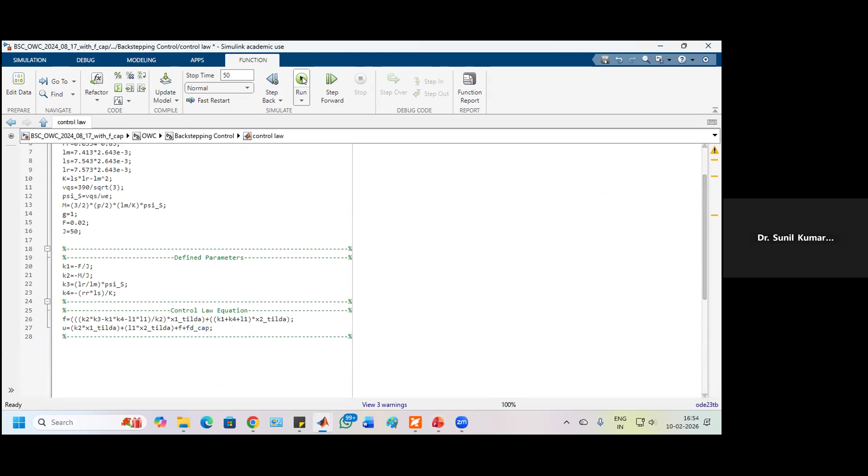Now we can see that it is more accurate. Then we can go for the neural network backstepping controller. So now if I replace FD by FD cap, so here FD cap is also the input to this block. So here FD cap is already available, so I can make this FD cap. So now if I run this,

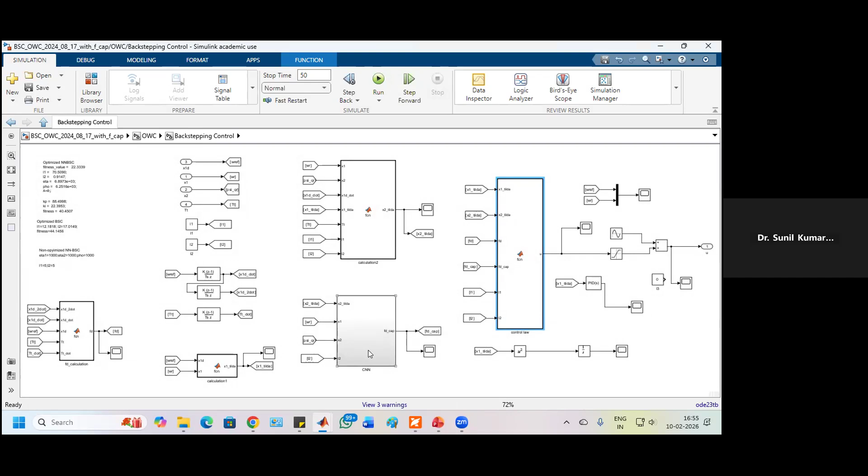now you see, this is the thing I wanted to show. The moment I use a neural network, the computation takes time. So why is it taking time? Because it is now computationally intensive. Here you see this block is a very complicated block. All these blocks you can see, and all these weights are actually getting trained in real time. You see all these differential equations are there.

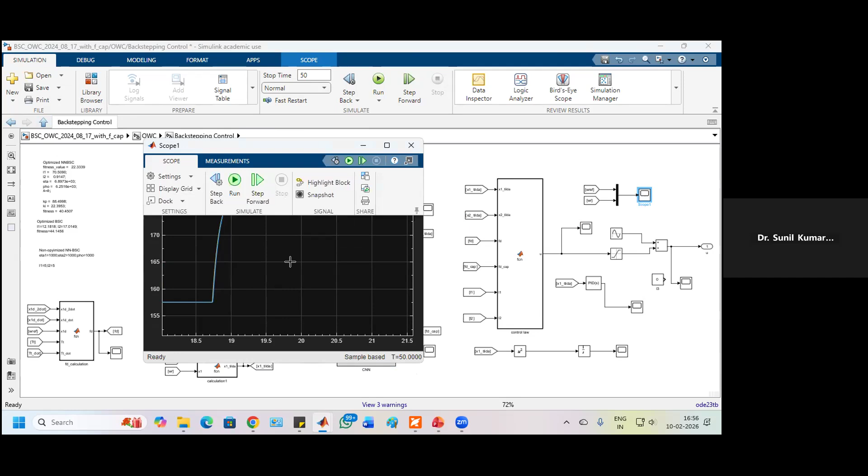So I have used 5 neurons. So for all neurons, we have to train all the weights separately. So basically it is a fifth order system. So based on that, it becomes very burdensome computationally. So now it takes time, but it will give a more accurate result. Now obviously those diagrams, we save all these diagrams, and then we just paste all the diagrams one after another, and that is how those diagrams are obtained.

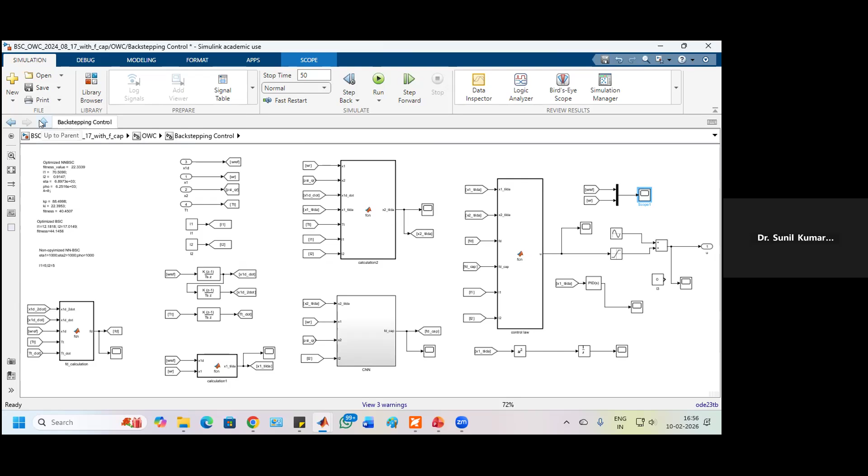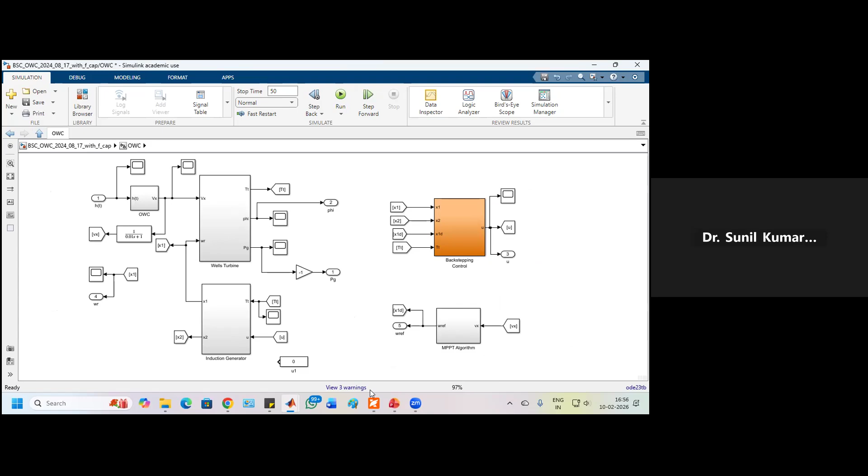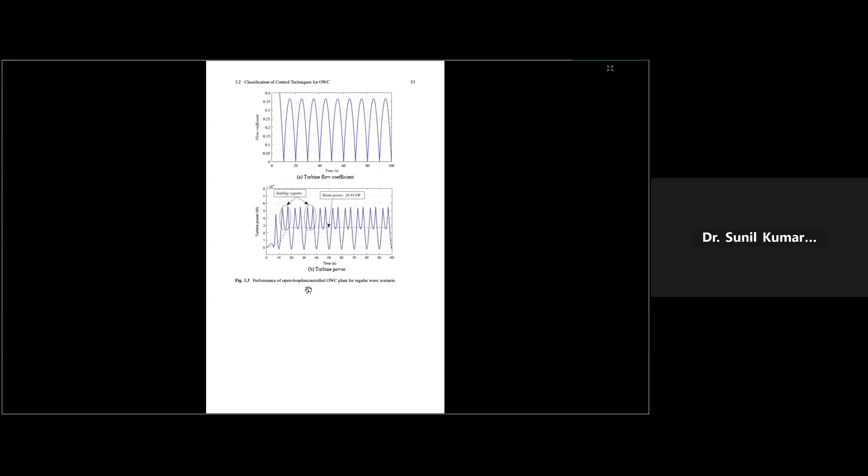For all these controllers, I have given the blocks, and equations are also given. So those equations you can build inside these blocks similarly. So here, all the Simulink blocks I have given. So this book can be found in Springer, and this paper I have already shared. So all other things, if somebody is interested, can be found.

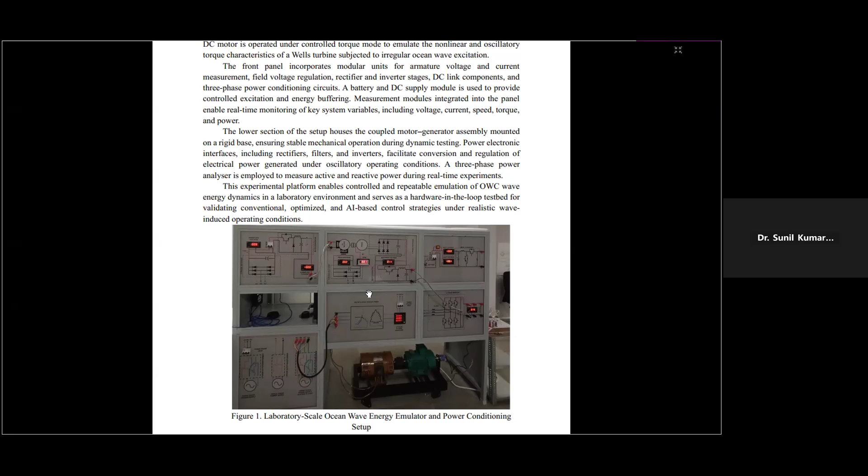The objective was to emulate the behavior of a Wells turbine in the DC motor. We had to close the project a little earlier because I had to come here to NIT Silchar. So by that time we did sinusoidal tracking of the torque - it was very close to sine waves. The only difference is we need to do more stochastic analysis, which we will be doing in future in collaboration with my colleagues at KIIT.

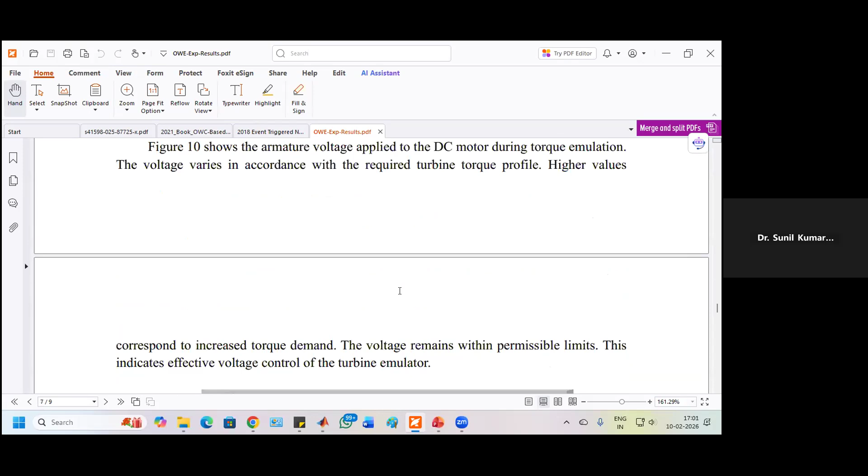Our objective was mainly for emulator design, so we were very successfully able to track this DC motor torque. We had a sinusoidal reference torque, and we were able to track it like this. So it gives some sense of actual Wells turbine-like behavior, like wave-like behavior. Incoming waves are varying - it is not perfect, but it can go more stochastic in nature in future. That is our objective.

But actually the funding I received was just only 15 lakhs, so based on that, all the hardware was of limited specification. We cannot stretch it too much - if we stretch it too much, the hardware will not be able to work. So based on our limitations, we tried to achieve this. In that same hardware, we will try to achieve a more stochastic nature of this torque tracking, so that we are able to present more wave-like behavior, meaning the power generated from actual waves.

It was only a laboratory setup. So there are many things to be done, sir. In this area, a lot of scope is there, but a lot of hard work is also required.

Okay, yes, thank you. Thank you, sir. Yes, really a wonderful work. Thank you so much. Any question, participants?

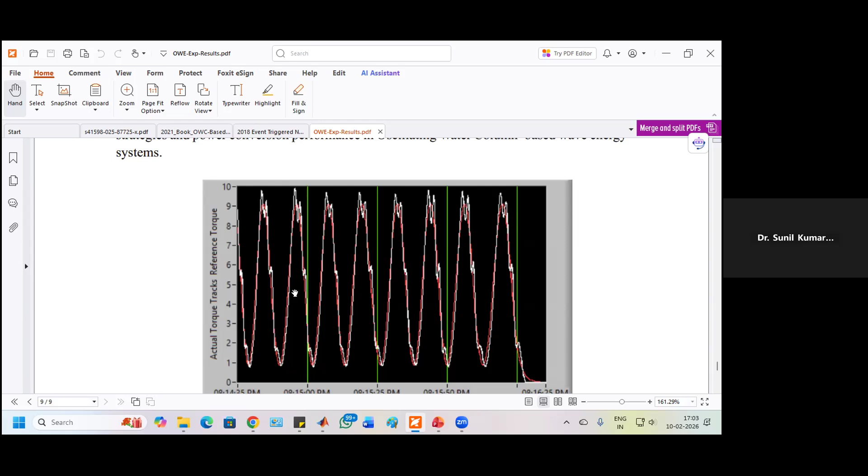Yes sir, but very nicely you explained this topic. Thank you, sir, really appreciate it. Thank you so much. So, Merin, if there are no questions, we can go ahead. Yes sir, let's conclude this.